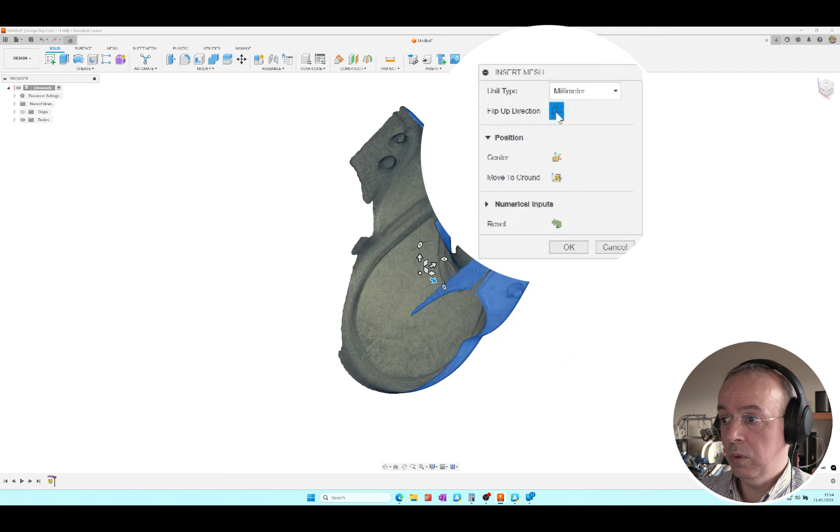So, starting in Fusion, with a document already open, the fastest and most efficient way to import the model is through the Insert menu, specifically Insert Mesh. The model in question is this one. Here it is. Initially, you'll see this tool that allows you to define units as well as the orientation of the piece, but in a very rough manner. For instance, notice it rotates the part in 90-degree increments, which isn't precise enough for this case.

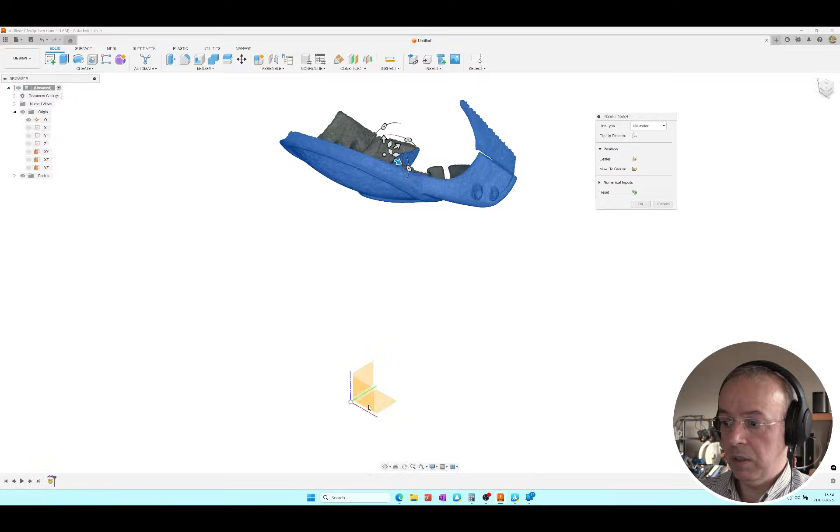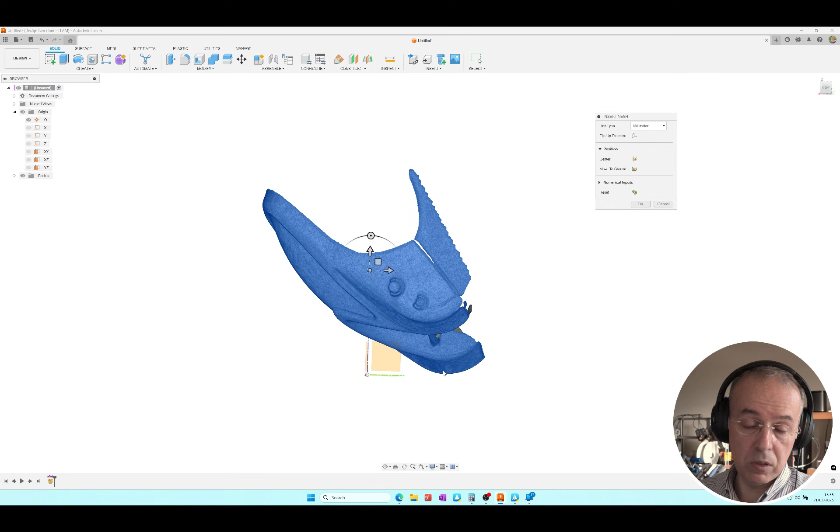Another thing to note is that the origin isn't visible, or rather it is visible below, and the model is slightly above it. By selecting Center, the origin or the model, it's unclear which one moves, will align. This is what I want. It's also possible to adjust the model relative to the ground using Move to Ground. As you can see here, the origin likely coincides with the model's lowest point, which is this area here. However, the model is still poorly oriented, so we'll accept this for now and proceed to align the model.

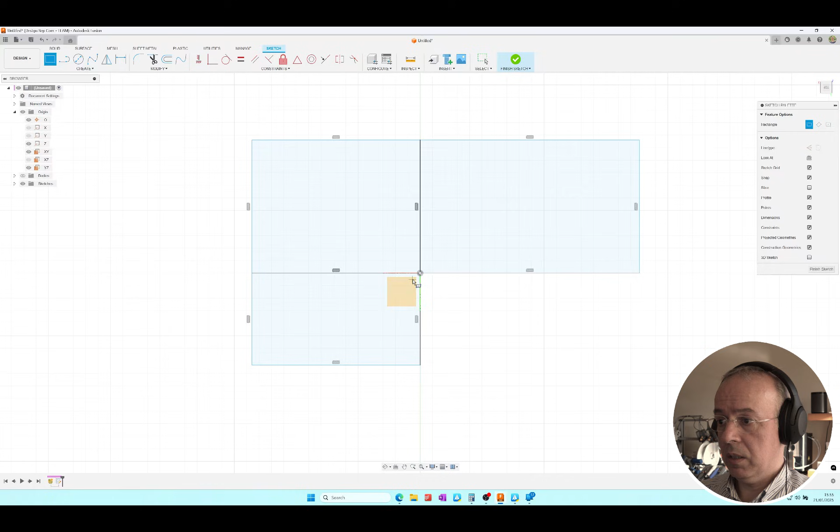The first thing I usually do is activate a sketch, possibly even hiding the model temporarily, as it can create some visual clutter. Often, I create rectangles like the ones you see here, roughly the size of the model, slightly larger or smaller. Precision isn't critical at this stage. I'll convert these to construction lines. At the moment, these rectangles are positioned on the XY plane.

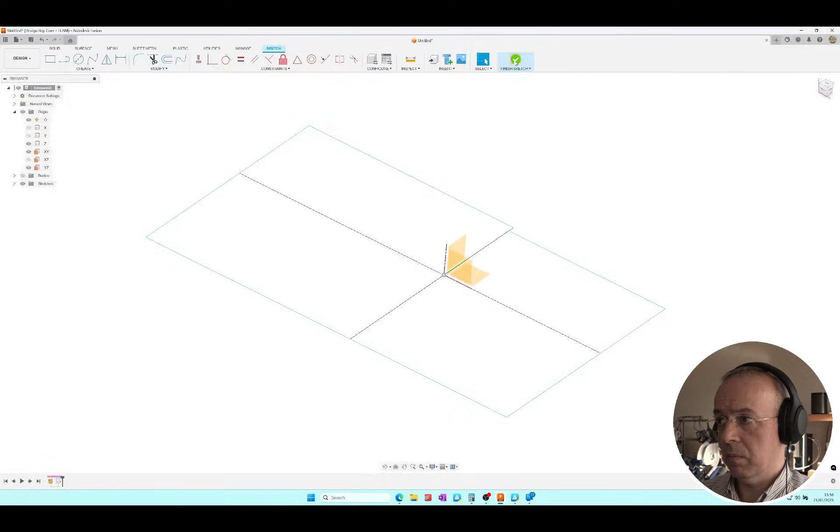However, I also want to add a reference in the Z direction, so I'll open a new sketch. I'll close the first one and proceed in a similar way. Again, no need for fine adjustments. Once done, I'll hit Finish. Now we have a larger reference area, and you'll soon understand why this is important. I'll reactivate the imported model, and now we'll proceed with its alignment.

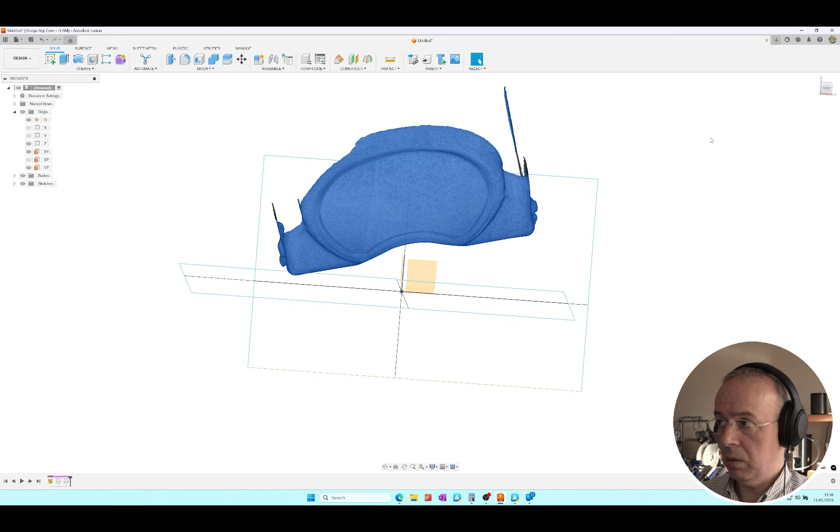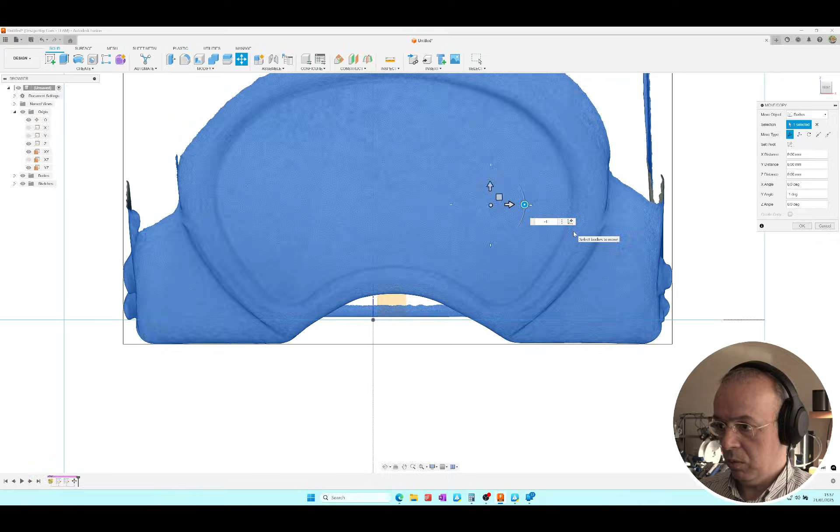Starting with this view, it doesn't matter which command you select for the movement. I'll use shortcut keys. The command I'm using is Move, and the shortcut is M. Despite using the Move command, I'm actually rotating the model. Notice that this part isn't perfectly aligned yet. There's a rotation here that I'll adjust and accept, which will register as a move in the timeline below. That's good practice. I'll make another rotation, approximately -1 degree. It's unnecessary to make very small adjustments at this stage since the model is still far from its correct position.

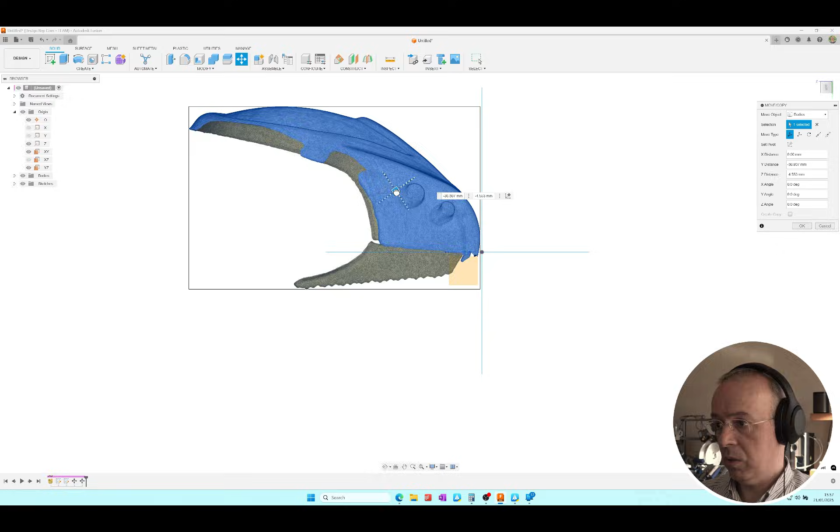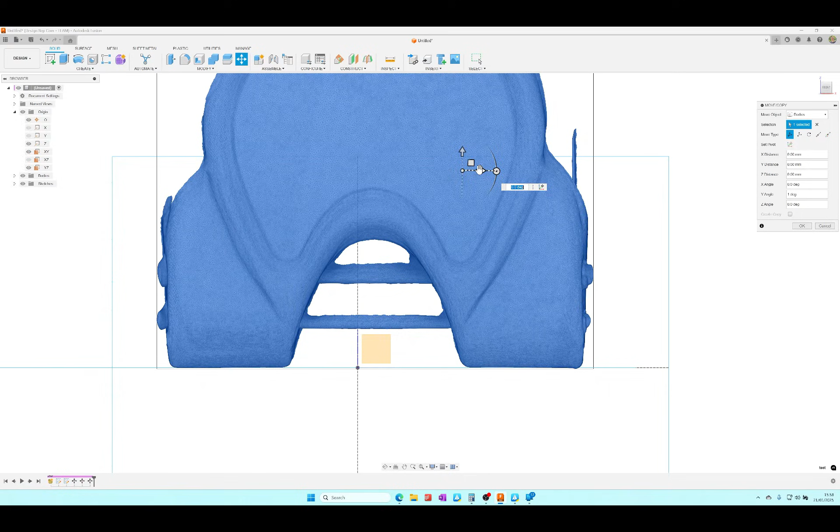I'll rotate it again. Notice how the lines I created earlier are useful. They help me position the model. Here, I'll make another rotation and lower the model slightly, trying to align this region, which isn't crucial as the entire jaw area here will be removed. After accepting this adjustment, you might notice a slight misalignment. It's much better now. I'll also position the object relative to the symmetry plane, approximately here. I'll verify its alignment from multiple angles. At this stage, I'd say the model is aligned. Now we can move on to the next phase.

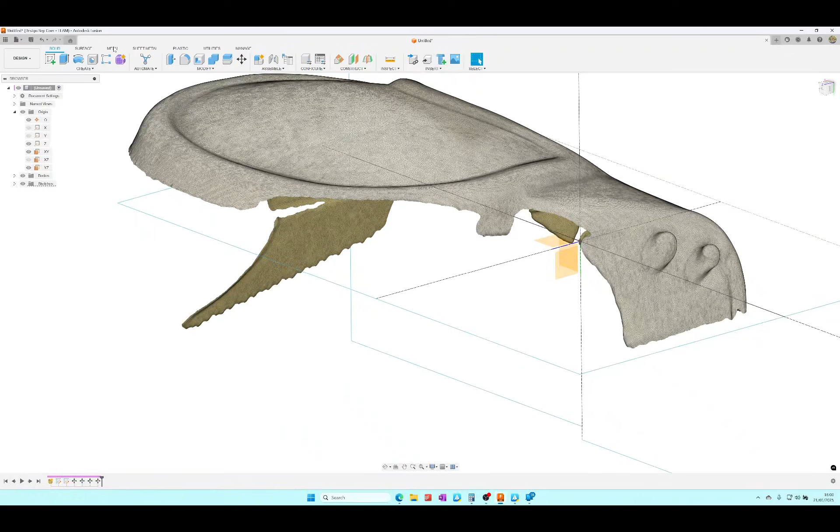I'll remove this section. In this case, we don't have a tool like Trim to cut the mesh. Instead, we'll use another tool: under Mesh, Modify, and Plane Cut. We select the body and the plane for the cut. Notice that everything on one side of the plane, above or below, will be removed. Now it's done. Another thing to check is the dimensions.

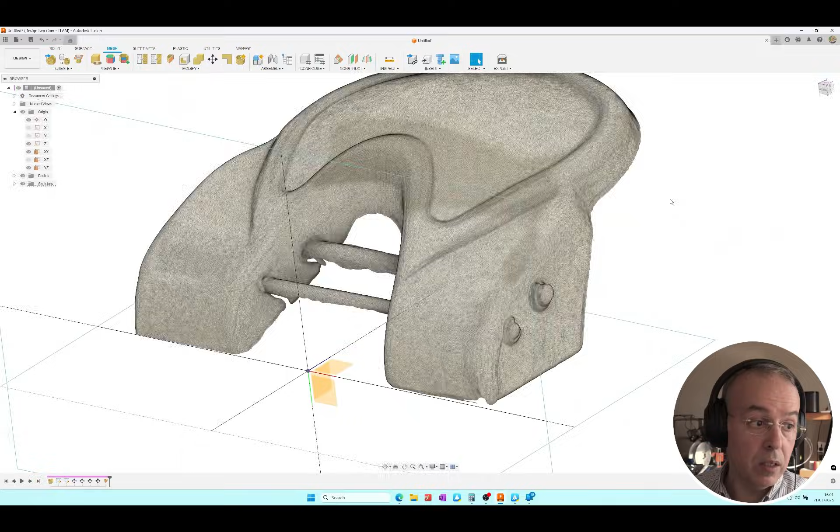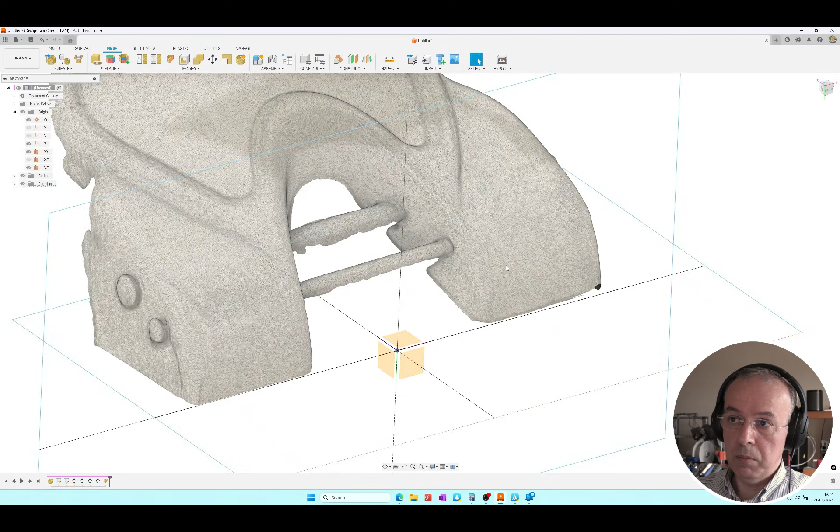The model is imported, so let's measure it. I'll rotate it slightly, select an aligned point, and then the opposite point. The measurement is 101.7 millimeters, which can be rounded to 102 millimeters, roughly what we expected. Keep in mind that when refining the mesh, the dimension may slightly change due to the reduction of elements. Based on my experience, this rarely happens, and if it does, the change is negligible. Of course, it depends on the reduction's intensity.

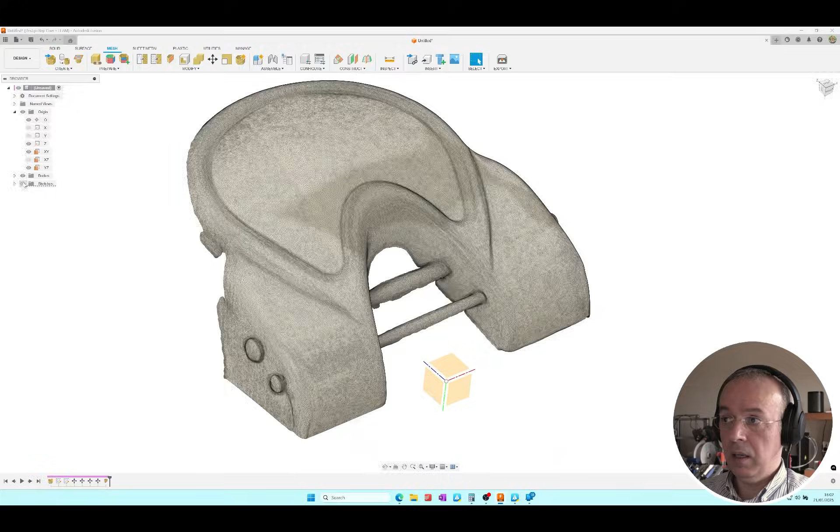In summary, we began by importing the model into Fusion, proceeded to align it with the origin system, and made necessary adjustments to its orientation and dimensions. We also explored basic mesh processing, including cutting and preparing the model for further work. These steps form the foundation for extracting and reconstructing geometry with precision using Fusion's tools. This video is just the first in a series of 4. In the upcoming videos, we'll cover more advanced techniques to refine, optimize, and rebuild the model step by step.